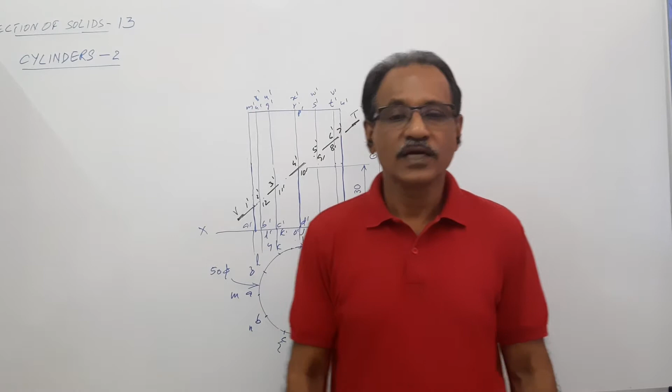Cylinders 2. A vertical cylinder 50 mm diameter, 60 mm axis is cut by a cutting plane passing through the center of the axis, making 40 degrees to HP. Cutting plane bisecting the axis, or passing through the center of the axis, making 40 degrees to HP.

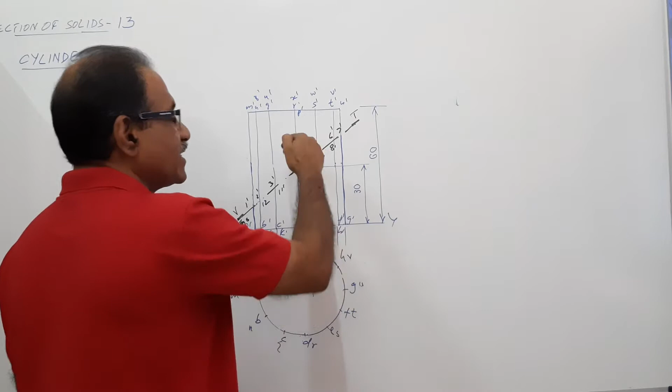How many generators does it cut? All the 12. First of all, you have to darken the boundary lines below the cutting plane to indicate that the top is removed and the bottom is kept.

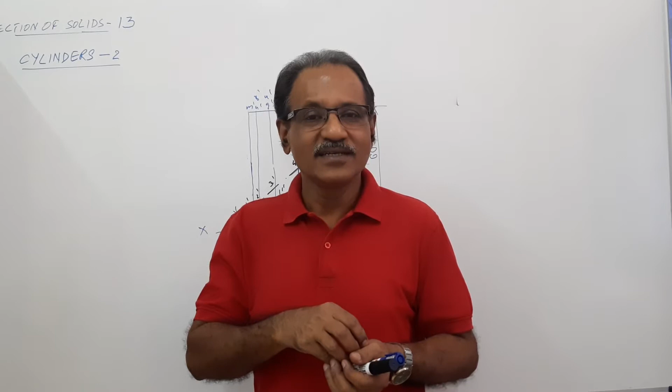Which portion you will keep and which portion you will remove, that is an issue. Which portion we will remove? We will remove a portion so that after removal you can see the fresh cut surface. In this case, you have to remove this, then only you can see the fresh surface in that plan. If you remove this and look from the top, can you see the fresh surface? No. That's the usual concept.

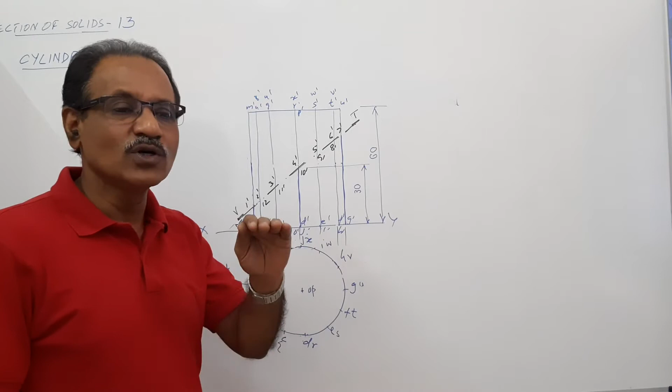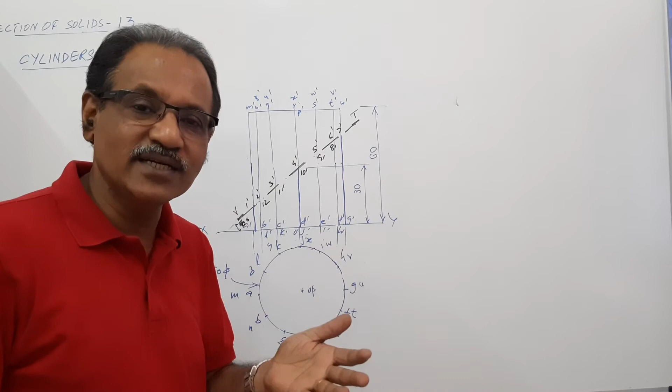We will remove the portion which can be removed so that you can see the fresh cut surface. That portion which will help you to see the fresh cut surface. We will remove that portion which will help you to see the fresh cut surface.

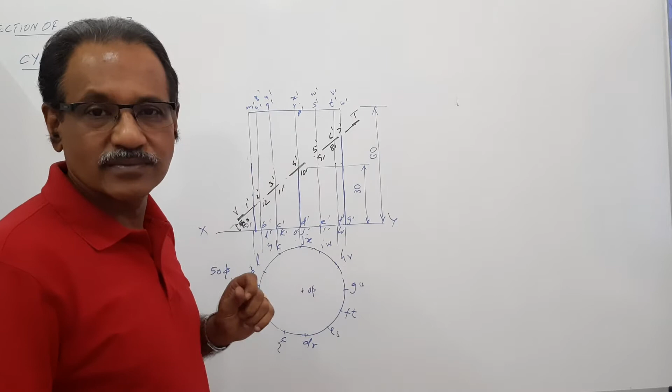Keeping the big portion there and removing the small portion, that is not the concept.

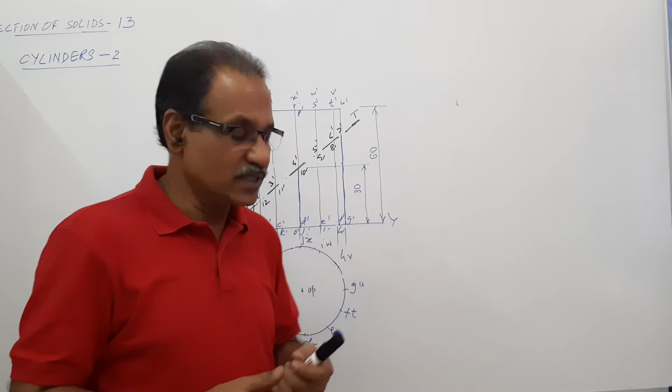The concept is remove that portion with which you can see the fresh cut surface. That's the concept. Okay, now 12 points. 1, 2, 3, 4, 5, 6, 7, 8, 9, 10, 11, 12 on the circumference around the body.

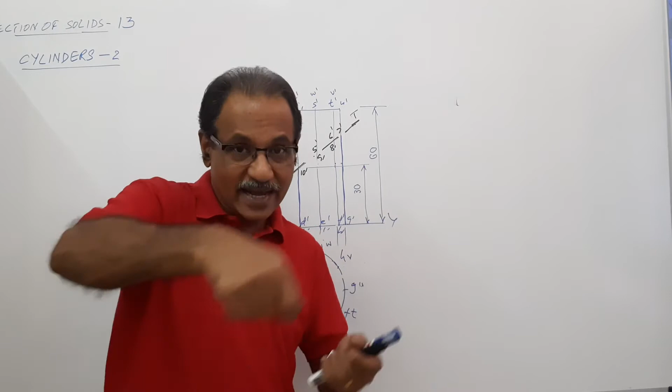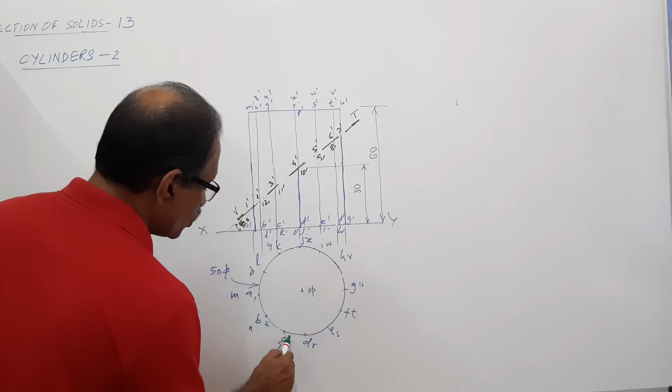1, 2, 3, 4, 5, 6, 7, 8, 9, 10, 11, 12. Hatch them.

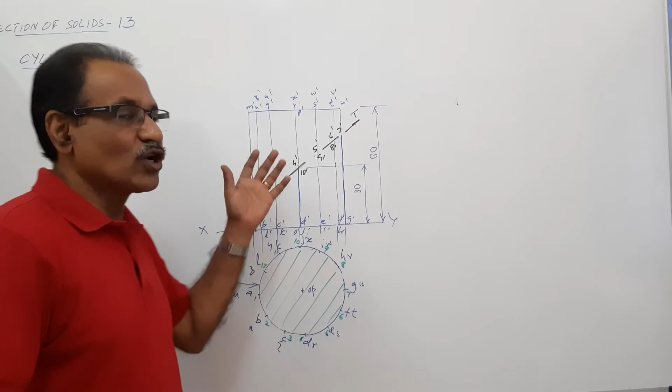What you have done? You have drawn the sectional elevation. You have completed the sectional plan.

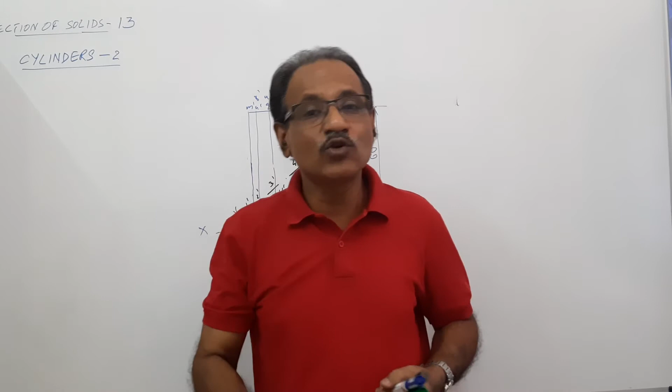Now, since the cutting plane is inclined like this, you have to look perpendicular to the cut surface to see the true shape. Since the cutting plane is inclined, only by looking perpendicular to the cutting plane can you see the true shape. That means you have to look from this side. That means you have to draw a true shape here.

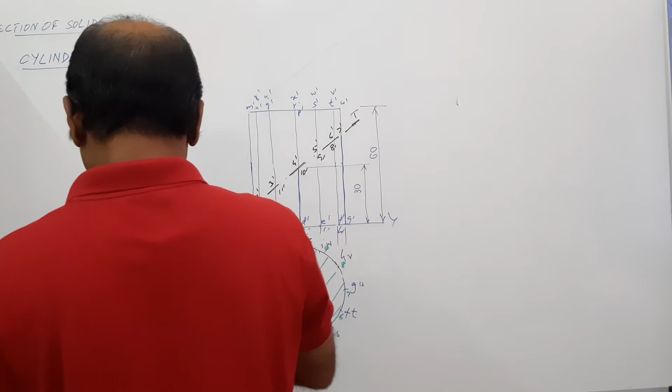How do you draw? Draw an x1y1 parallel to the cutting plane. Draw projectors through all points where the cutting plane cut the object in the elevation, perpendicular to x1y1.

1, 2, 12, 3, 11, 4, 10, 5, 9, 6, 8 and 7. All these are perpendicular.

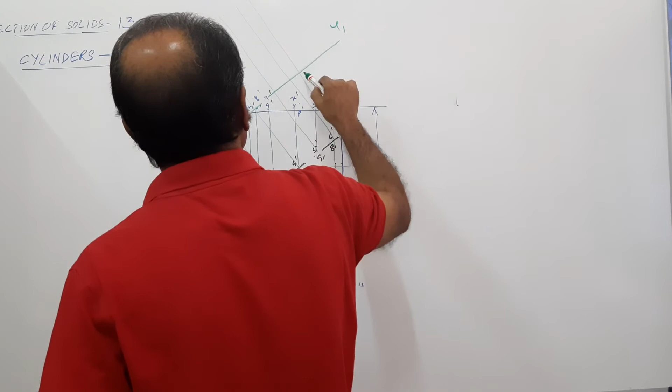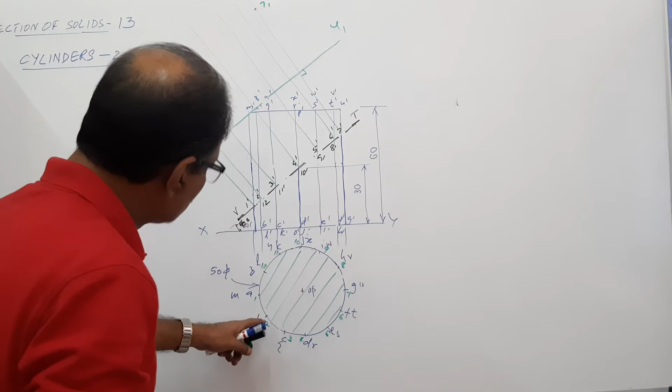Now, 1 is this much distance below xy and same is the distance of 7. Take that distance and mark on the projector through 1 to get 1,1 and through the projector 7 to get 7,1. 2 is this far away. 2,1, 6,1. 3,

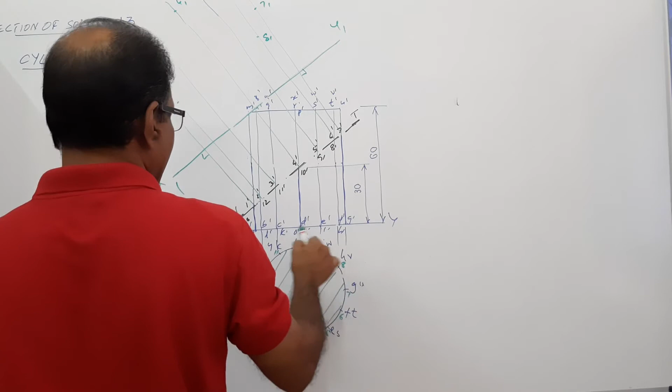3,1, 5,1. 4, 4,1. 8, 8,1, 12,1. 9, 9,1, 11,1, 10,1.

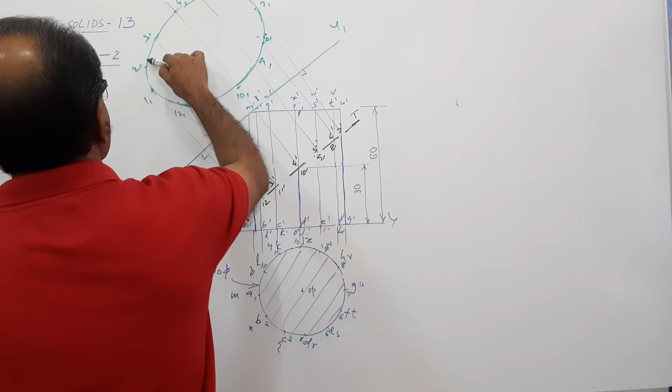Connect them by a smooth curve. Connect all these points by a smooth curve. What you get is an ellipse. You can hatch this at 45 degrees to the x1y1. This is an ellipse.

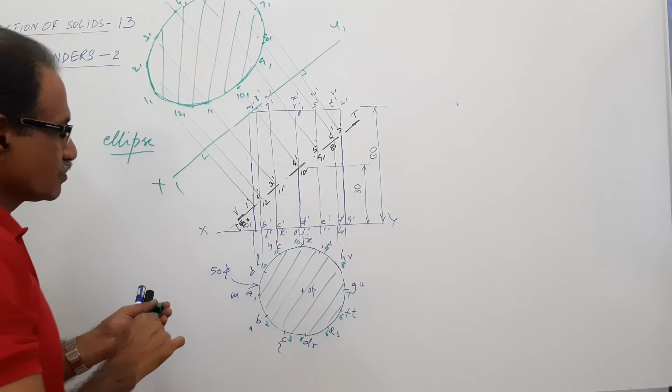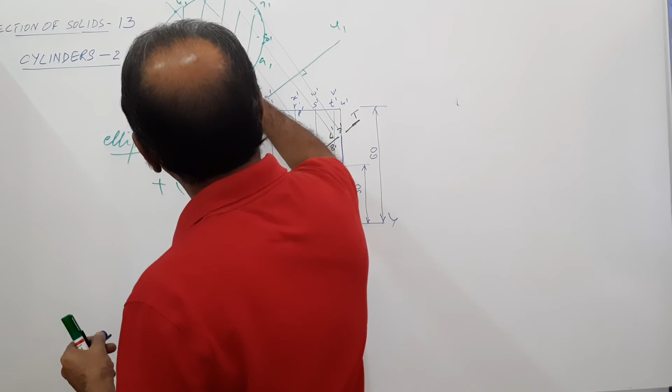What have you completed? You have completed the true shape. This is called the true shape. You have completed the sectional plan, sectional elevation and the true shape.

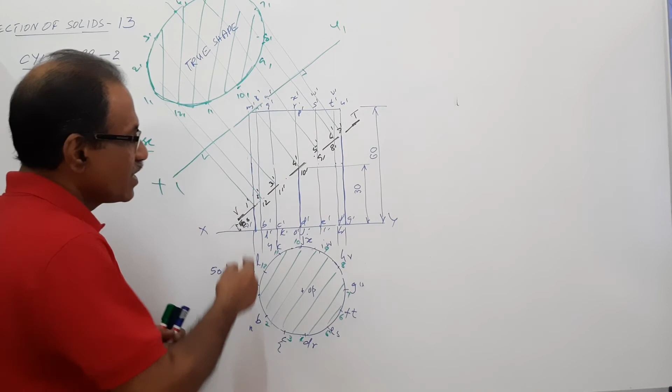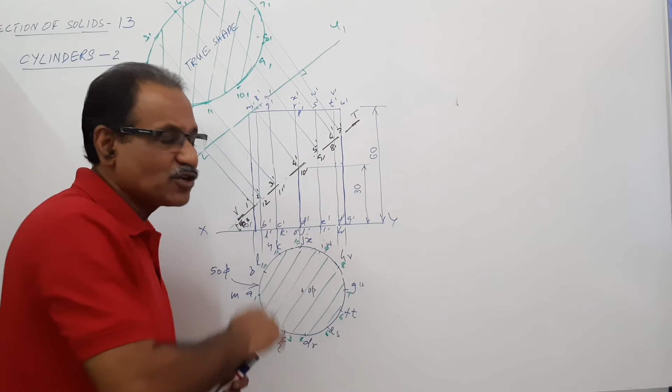Now, when will you get the true shape as an ellipse? You will get the true shape as an ellipse if the cutting plane cuts all generators and the cutting plane is inclined to the base. If the cutting plane cuts all generators and is parallel to the base, you get a circle. And when the cutting plane becomes inclined to the base and cuts all generators, you get an ellipse.

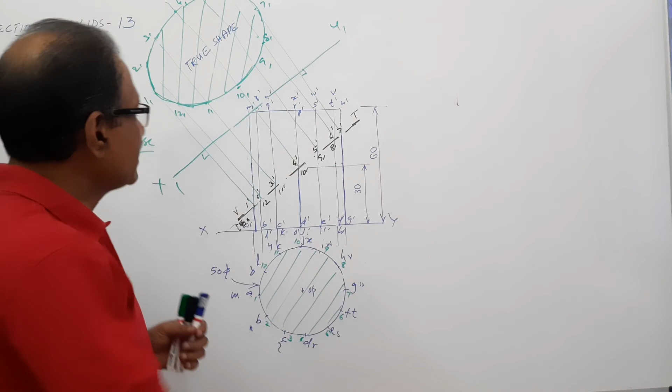Agreed? What is the major axis of the ellipse? Major axis of the ellipse is the length of the cutting plane through the cylinder. What is the minor axis of the ellipse? Minor axis of the ellipse is the diameter of the cylinder.

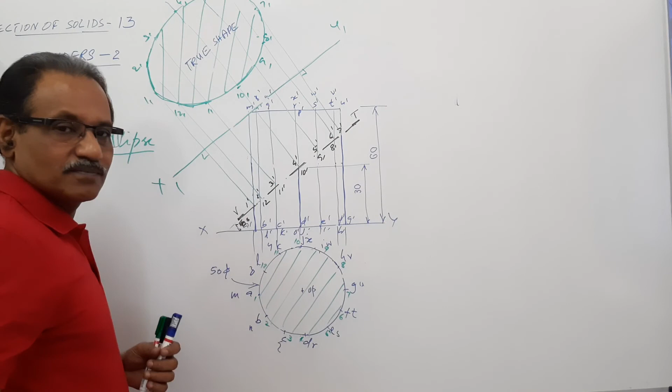Agreed? Okay, when will you get the biggest possible ellipse? The biggest possible ellipse is obtained if the cutting plane passes through A' and U'. The cutting plane passing through A' and U' gives you the biggest possible ellipse.

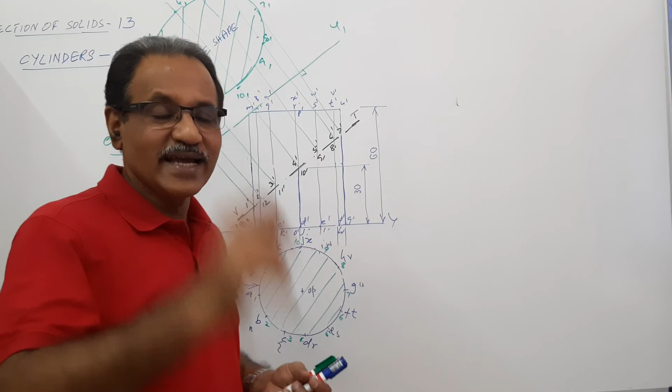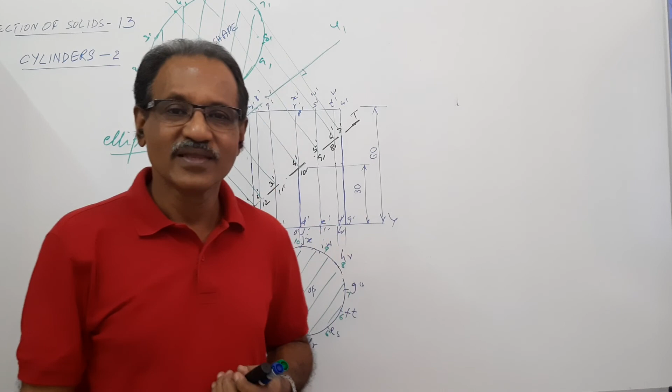What is the major axis? Major axis is equal to the diagonal of the rectangular elevation. The diagonal of the rectangle seen in the elevation will be the major axis of the ellipse. Agreed? Thank you.